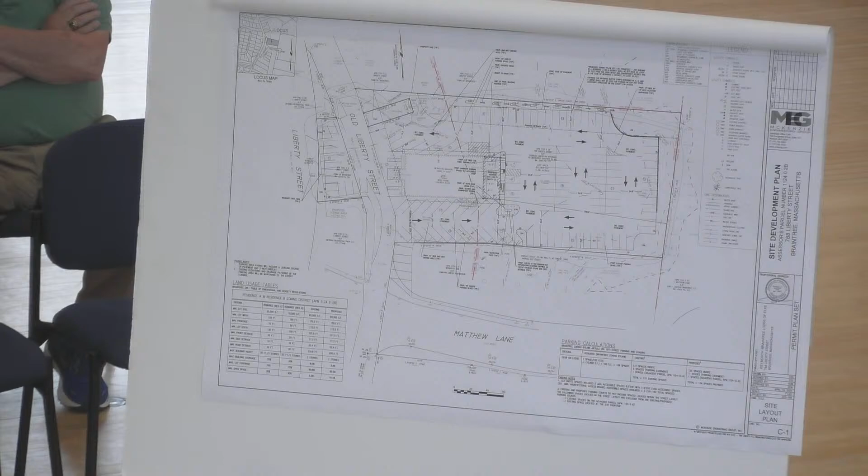The site plan shall provide refuse collection and disposal, and service areas. What's called for here is that the disposal service shall be at the rear of the property, to the left side of the property, in an area that's been approved by the planning department as well. There's been some discussion about it, and they've come to an agreement about where to put the dumpster.

The site plan shall provide for screening and buffering. We are suggesting that the site plan shall improve the screening and buffering that already exists on the subject property, particularly with the enhanced buffer area on the left side and the rear side of the property.

The site plan shall provide yards and other open space as required by the chapter. There's an outdoor yard area, and there's plenty of open space. The open space is being increased, I think from 9.2% to 19.5%.

The SPGA shall review for economic effect on, and the general compatibility and harmony with, adjacent properties. We're suggesting that there shall be no adverse economic impact upon adjacent properties and other properties in the district. The neighboring property to the rear is an apartment complex, as we know, and it's a substantial distance from the applicant's building and parking area.

The property to the left is conservation land, which shall be maintained as conservation land owned by the town, and the buffering area is being enhanced by the applicant's plan. The property to the right of the applicant's building is adequately protected from vehicles and delivery traffic coming upon the applicant's building. There shall be no problem with general compatibility and harmony with adjacent properties and other property in the district. We don't think it's going to affect the other residential housing in the area in any adverse way.

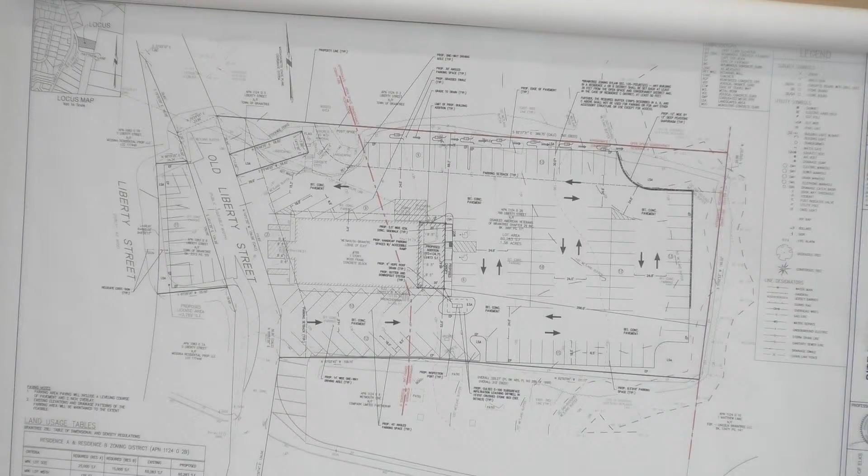As I mentioned, the mitigation areas are located on the left side of the plan. Both areas will completely remove the bituminous concrete pavement and debris in that 25-foot no disturb zone, and they'll be hand-seeded. So that's the technical details of the plan. I can help answer any questions that the board members may have.

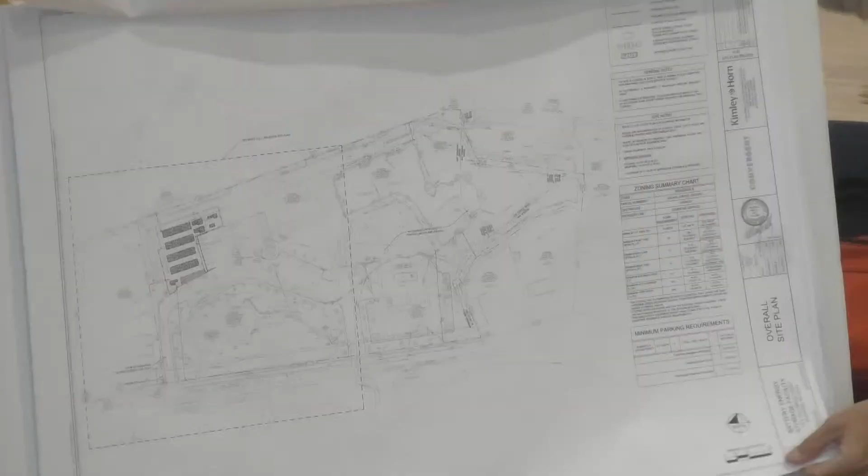So our facility here, as you can see on the sheet, is approximately 8,600 square feet in area. As I mentioned before, it takes up a portion of the existing parking lot, as well as a portion of the existing lawn area to the north.

In terms of impervious area, we're actually reducing the impervious coverage on the entire site by about 2,100 square feet. We're keeping the parking, as Amanda said, within the minimum requirements. Existing parking here, as noted, is 128 stalls. We're removing 15 for a total parking proposed of 113. The required minimum is 109, so we are still well within that requirement.

In terms of the facility itself, it will be contained within an 8-foot high chain link fence with black plastic slatting to screen it. Within that facility would be concrete pads which house the electrical equipment, the battery energy storage system containers themselves, as well as the associated electrical equipment, most of which is owned and operated by Convergent, some of which towards the south end of the site is owned and operated by Beld, transformers, interconnection equipment, and the like.

That interconnection is tied out to the existing electrical grid and just into the street there. Again, in terms of what's inside the facility, on the ground we have gravel. It's a purposefully sized gravel, a 1.5 minimum washed stone. I'll get into that a little bit later with regards to the stormwater management system that we're designing here. But generally it's pretty simple. That's everything that's contained within the facility.

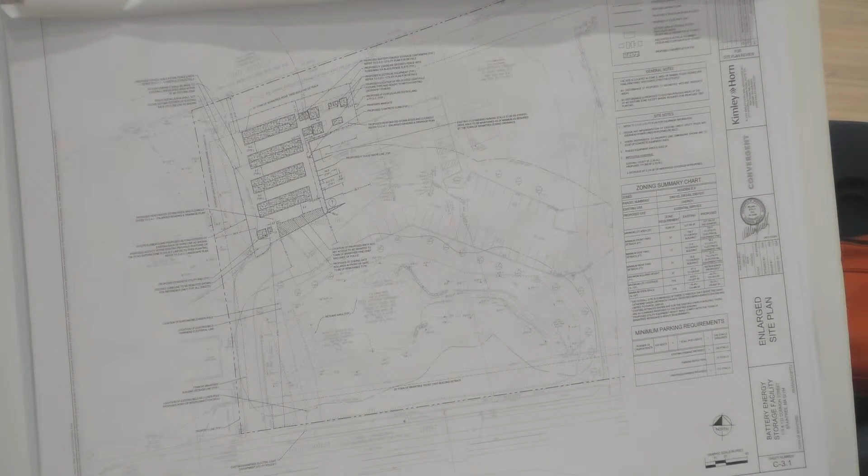I think the reason that the previously proposed infiltration system, when the church was getting built, was not built, was because I believe they may have done their groundwater testing on the eastern half of the site, where it was a little bit deeper, and then they ran into that issue during construction. In any case, the reason that I mentioned the groundwater is because of what we're proposing for our stormwater management system. It's a little bit unique in terms of what we're providing.

This here would be technically a mixture of redevelopment and new development, by way of that we are redeveloping an existing developed parking lot, and it would be technically a portion of new development because we're developing existing lawn and grassed area. But wholly we're truly considering this a redevelopment, and we're providing a stormwater management solution that matches the existing peak rate runoff, and it does that to the maximum extent that is feasible for us, given the constraints that we have on the site. So to get into a little bit about that, I'd like to turn the attention to sheet C 7.1.

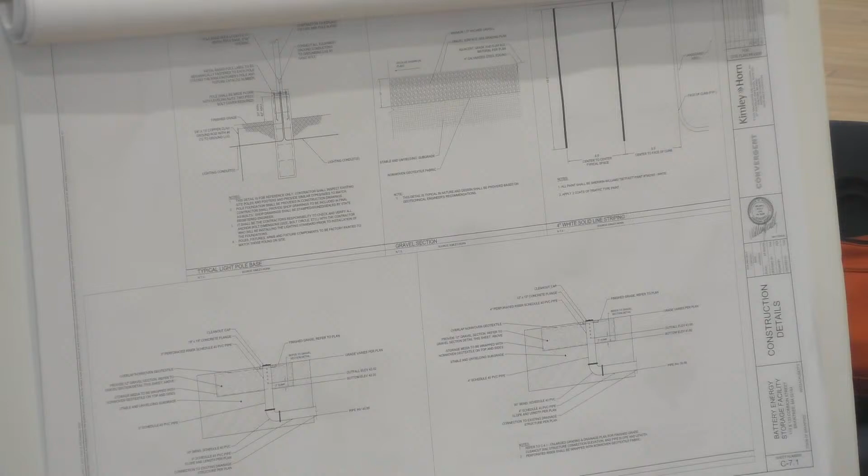So what we are providing within the gravel area of this facility is a 12-inch deep section of 1.5-inch minimum washed gravel. The reason we're providing that is to create a certain amount of void space. We're using a 35% void space calculation in this section to provide some sort of quantity control. That outfall would be going into the existing system via a perforated riser pipe located in the southern portion of the site, as well as the northeastern portion.

The plans we had submitted previously noted only a riser outfall in the southern portion of the facility. After appearing before the Conservation Commission, there was concern with a low point in the northeastern area of the site, and a suggestion was made to hydraulically connect that point to the existing system to get water out quicker. So we've done just that, placing basically the same apparatus for outfall in that northeastern corner.

This system allows us to take advantage of the void space within that 1.5-inch minimum washed stone, allowing infiltration into the soil for groundwater recharge as well as storage and quantity control. We're providing a small 2-inch sump on the bottom of that section and a perforated riser pipe above it, so we essentially have constant outflow above that 2-inch sump, which gets sent out ultimately to the existing network on site, to the existing pond, and then out to the brook via how it currently is being outfalled.

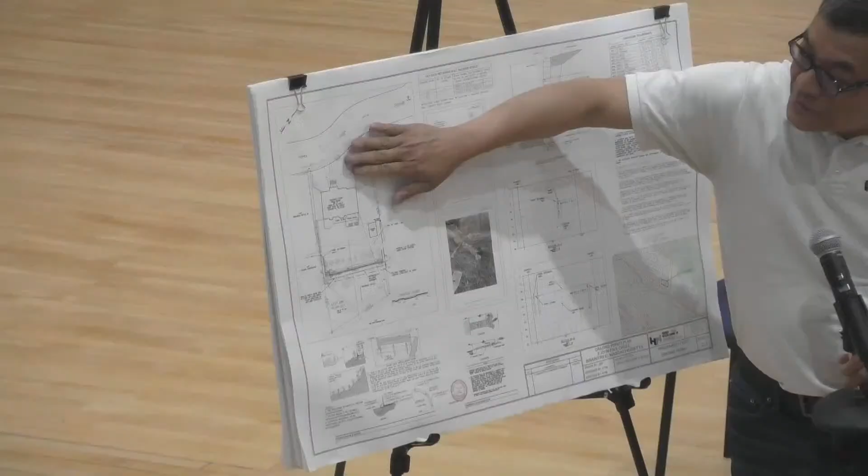Take the microphone this way. The site generally slopes back this way from the street towards the back. And on the back area, right about where the proposed wall is, there is a big drop in grade, probably about 10 feet or so from top to bottom.

And this area, I didn't notice it was actually wetlands when I visited the site, because before I go to the site, I checked the Mass GIS and the town GIS, and it doesn't show as wetland at all.

When we visited the site, we noticed the drop in grading here, and what the owner had started doing without knowing that he had to have a grading permit or the conservation filings. They started to work on the slope. He tried to build a retaining wall to stabilize the slope.

They excavated some material and put it on the side to start putting the form down for the proposed retaining wall. And then they got a stop work order. So that's the time I got involved and came in to help them design the wall and do the proper filings.

There's no proposed impervious area at all. The whole purpose of this is basically to stabilize the slope that has signs of eroding. We met with conservation last week, and they have some concern about the construction sequencing. They want to make sure there's not any further impact to the wetlands.

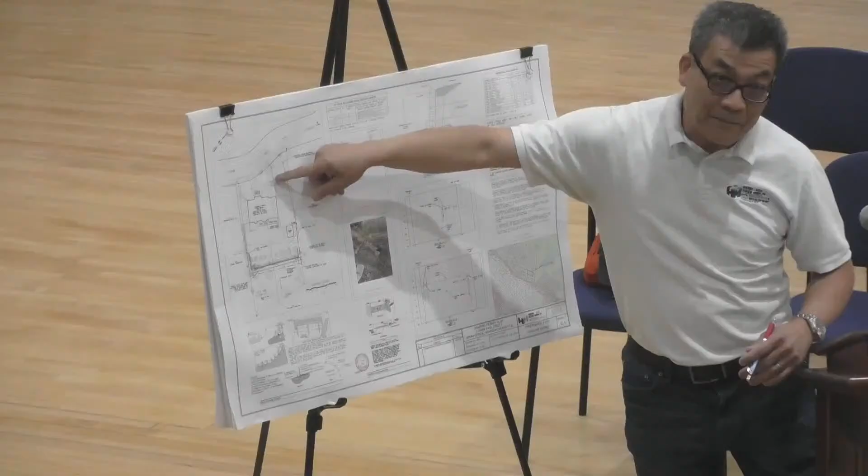One of the things I would like to mention is that this area on a dry day doesn't look wet, but there is an 18-inch pipe coming into the property, and I believe that is taking all the street drainage. I don't believe there is an easement based on our survey.

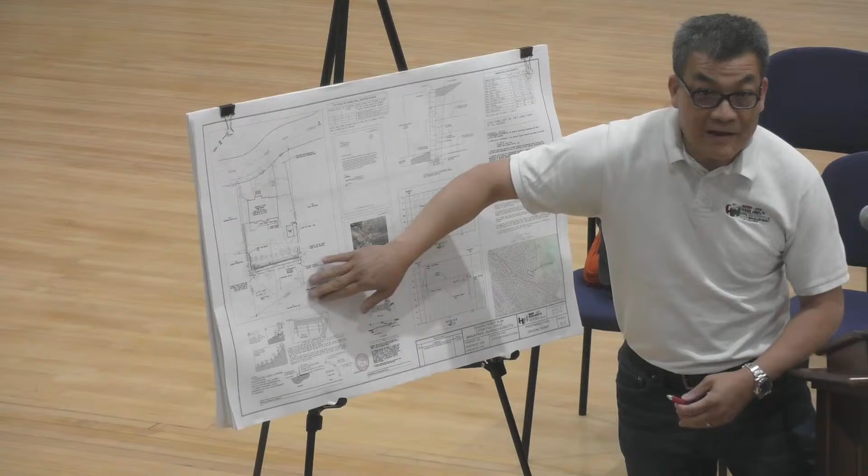So this area, different orientation, the pipe comes in around these locations. It's an 18-inch pipe, pretty large. On the back here, the grade starts rising again because that is the railroad track from the shipyard. So it's a depression right at the rear portion of the property where the wetland is, accumulated over the years from the street drainage.

Sorry to interrupt. Is that what's marked as drainage ditch, or is that something else? Well, there is a drainage ditch.

Historically, there's a drainage ditch, but with all the runoff coming in from the roadway, it's pretty much not maintaining that area. There's a lot of erosion. So the drainage ditch kind of disappeared and formed another drainage ditch within this area.

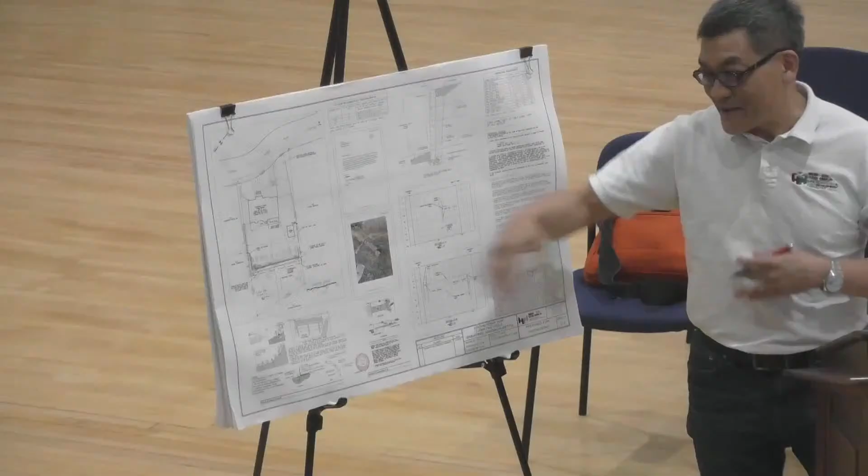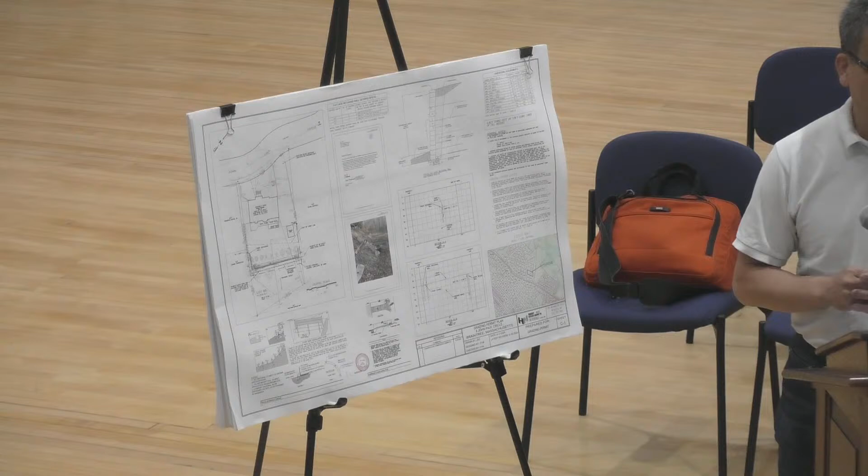What we're trying to do is retroactively ask for approval from the board to build a retaining wall and restore the wetlands. Again, we are not asking to build anything that makes more space or proposes any impervious area. We understand there's an after-the-fact filing, which the client - they don't speak the language and wasn't aware of these regulations, so we are helping them get through the hurdles.

Okay, thank you. I know the staff report had quite a few open questions on it. Assistant Director Murphy, can you run through some of the questions that you had? Yes, Madam Chair.

So staff reviewed this in the purview of Article 12. There are some comments as it relates to certain sections under Article 12 that we have asked the applicant to revise the plan to. There's questions about vegetation, whether things need to be removed. Out in the field, there is quite a substantial amount of vegetation there, close to where the retaining wall is and certainly along the property boundaries.

There is a question I have. You show an existing wall footing that passes between the common boundary line between 9 John Paul and 17 John Paul Circle. I'm just curious whether or not...

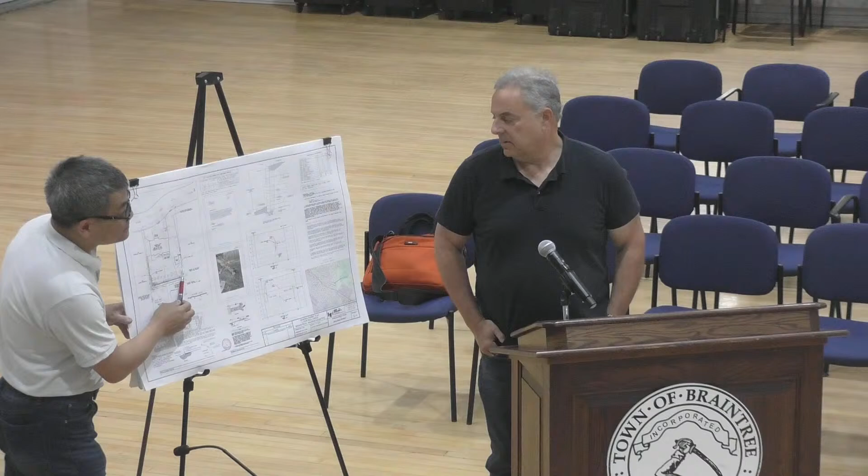Okay, and that's going to return? Return towards the uphill, just to make enough room to return and make the grade. I haven't seen the plan yet, so I'm just curious, how tall is that wall going to be? It starts from roughly about 3.5 feet and gets higher to about 8 feet, just following the natural grade.

The other thing I'd like to point out, I would like to make sure if they need my permission, I just want this on record, that the owner should be cleaning along the property line where they threw a lot of their blocks and debris onto my property, and I mentioned that to the building inspector. So that's going to be a condition if I have to give my consent. Absolutely. Otherwise, I have no further questions.

Thank you. All right, if you'd like to come up, just state your name and address for the record, please. Joanne Farrington, 665 Commercial Street.

I'm actually on the other side, and there is some woods, maybe 10 to 15 feet of woods, in between my house and their backyard. So I just wanted to know how far... This side. Yes, I'm right here. That's me.

Is any of this woods in my backyard going to get disturbed? No, we're not proposing to cut any trees down. It's really bushes and shrubs right there. It's messy, but I want it to remain. I think it's a whole row of evergreen trees. Right, and we're staying away from that. But back here it goes further back, right? There's no plan on going any further than where. Okay, so when I look in my backyard and see this, it's not going to approach any closer to those woods.

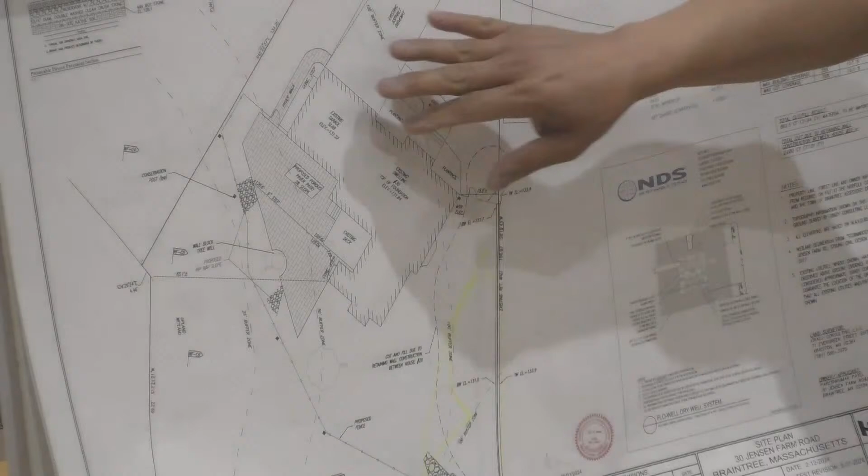In January, the grading that happened on 30 Jensen Farm Road is limited to the area adjacent to the wall. Since we are doing the application, the owner also requested he'd like to do a patio in the back.

Flip to the next page. So currently, the area is pretty much just dirt and lawn, and there is, I call it more like a ditch. It's supposed to be a bio-retention area, very similar to many of these houses around here. The builder kind of excavated a hole on the ground, and that was the bio-retention area. So the roof drain currently drains into the bio-retention area.

So the owner would like to beautify the area, put in a permeable pavers patio, and he'd also like to reconnect the roof drain into 2 cisterns that collect the runoff from the roof, so he can reuse the water for irrigation. From the cistern, it's going to overflow. When the cistern is full, it's going to overflow into a Flo-Well, an NDS Flo-Well, which is about 30 gallons or so.

That has an open grate on top. So when the cistern is full from the roof, it'll overflow through the surface grate and then spill into the permeable pavers area. The permeable paver has a reservoir course about 6 inches or so. We are going to specify exact products for it. So when the rainwater gets into the permeable paver, there's going to be a gap in between. Rainwater will drain through the gap and into the sand filter course, and then the water will be stored in the reservoir course, which consists of 6 inches of crushed stone, 3/4 inch crushed stone, that stores the water for infiltration.